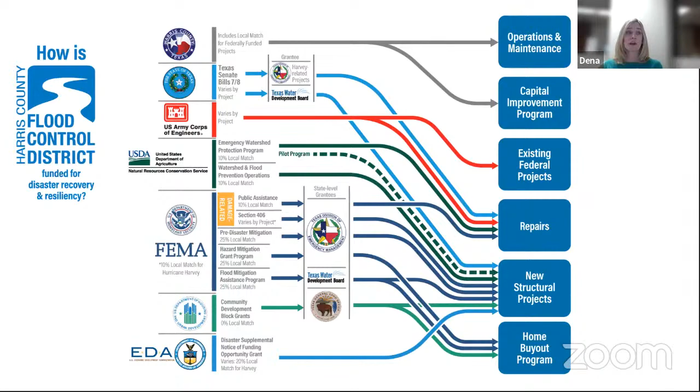We will now move into the part of the program that is specifically about tributaries P138-01-00 and P138-01-01 in the Greens Bayou Watershed Feasibility Study.

The Greens Bayou Watershed encompasses portions of the city of Houston and Humble. The upper reach flows in an eastward direction, and the lower reach flows southward into the Houston Ship Channel.

The watershed covers about 212 square miles and includes 4 primary streams: Greens Bayou, Garner's Bayou, Halls Bayou, and Reinhardt Bayou. There are about 308 miles of open streams, including the primary streams and tributary channels.

Flooding of homes and businesses along Greens Bayou and its tributaries has occurred numerous times in the last 2 decades, with devastating flood levels throughout the watershed brought on by Tropical Storm Allison in 2001 and Hurricane Harvey in 2017.

High-density development combined with significant floodplains cause high damages during frequent flood events. Additionally, storm surges can influence flooding levels along the lower 10 miles of the watershed.

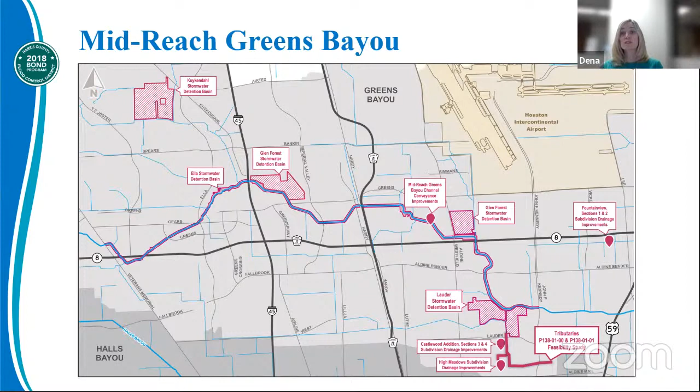Our study area is located on the bottom right-hand corner of the exhibit near the Flood Control District's Lauder Stormwater Detention Basin and the Harris County Engineering Department's Subdivision Drainage Improvements projects in the Castlewood Addition Sections 3 and 4 and High Meadows subdivisions.

Let's now look at the study area. It is located primarily west of JFK Boulevard and between Lauder Road and the Aldine Mail Route Road. Our evaluated area has a drainage area of just over 1 square mile and consists of approximately 1.76 miles of open channels.

While every flood risk reduction project is unique, they all have a common life cycle. Each project begins and ends with common and predictable milestones along the way. Whether a project moves forward from one stage to the next, and how quickly, depends on many factors, including the availability of funding, shifting community priorities, and other changing circumstances.

Each of the stages in the project life cycle concludes with a final product. For example, the construction stage concludes with a built project. For the feasibility study stage, where we are right now with this project, the final product is a report that summarizes the study and identifies a recommended project, which we commonly call the recommended alternative.

We hear often, just build, stop doing studies. We understand that. However, the study portion is essential. There are limited dollars for flood risk reduction, and we want to ensure that we build the right project and that we maximize the use of dollars spent.

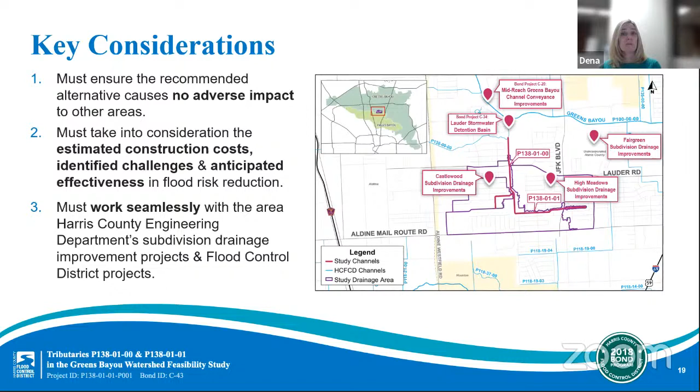Throughout this presentation, we will be using terms like the 500-year and 100-year storm events. So let's go ahead and discuss what that means. Using the 100-year storm event as an example, this is a rainfall event that has a 1% chance of occurring in any given year. In addition to being called a 100-year storm event, it can also be referred to as a 1% annual chance event.

That does not mean that if we have a 1% annual chance event today, it will be another 100 years before it occurs again. Rather, it means that in any given year, we have a 1% chance of a 100-year storm event occurring. This is simply a measure of the expected chance of a specific rainfall event based on available historical data.

The subdivision drainage improvement projects underway with the Harris County Engineering Department are anticipated to help reduce flooding risk in those subdivisions. The existing level of service, which is the amount of stormwater a tributary can carry before it overflows its banks, was estimated for the 2 tributaries in the study area.

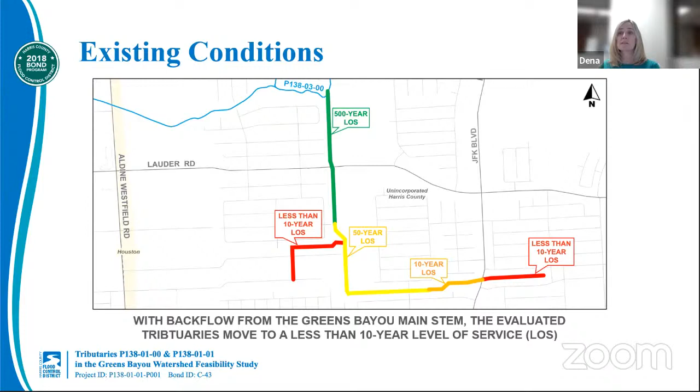The study team also noted that when backflow, the stormwater that overflows from the main stem of Greens Bayou during major rainfalls, moves into these tributaries, it causes both tributaries to move to a less than 10-year level of service. A closer look into the level of service for these tributaries provided insight into the cause of existing flooding issues in the area.

Based on the team's evaluation, we found that flooding sources in the area include backflow from Greens Bayou due to its limited capacity. The team identified that the backflows from Greens Bayou were one of the main factors that caused flooding along these 2 tributaries during Hurricane Harvey and other major storm events.

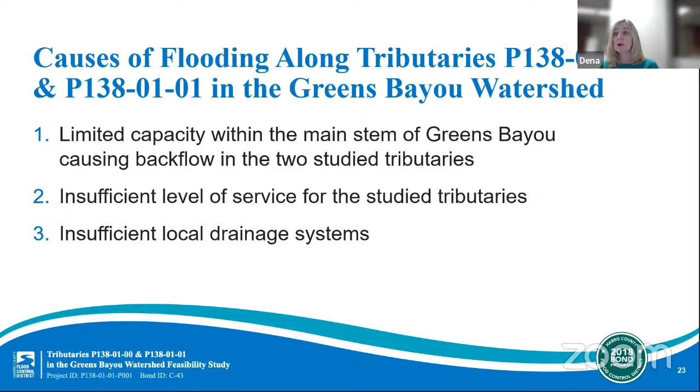Insufficient level of service for the two tributaries, as discussed on the previous slide, and insufficient local drainage systems, which will be addressed in part through the Harris County Engineering Department's subdivision drainage improvement project.

Through our initial evaluation, we have identified several potential opportunities and constraints to accomplish our ultimate project goal. The opportunities include that our study team did not identify any significant environmental challenges or utility conflicts in the study area. This is helpful for keeping costs low and giving us options on how to design an optimal flood risk reduction project for this area.

However, one constraint is that there's limited land available for constructing a stormwater detention basin or making significant channel conveyance improvements without acquiring additional land and/or structures. Our recommended alternative must take this into consideration.

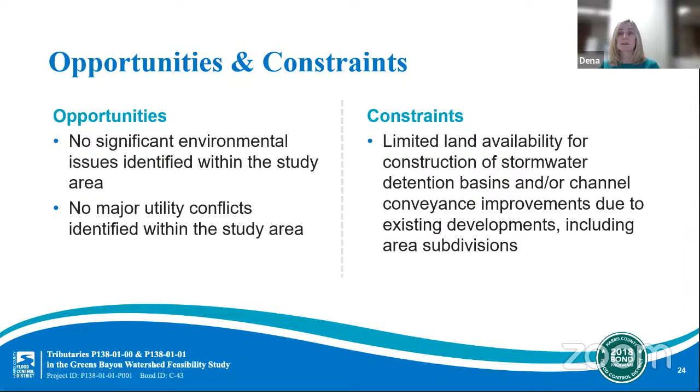When we begin a feasibility study, we always pull out our flood risk reduction toolbox. In our toolbox, we have various techniques we can deploy to reduce the risk of flooding in a particular area. It is important to find the right type and right configuration for each project, which is what we do in the feasibility study stage. On this slide, you will see several of our typical tools, but tonight we will focus on the first two items in the toolbox.

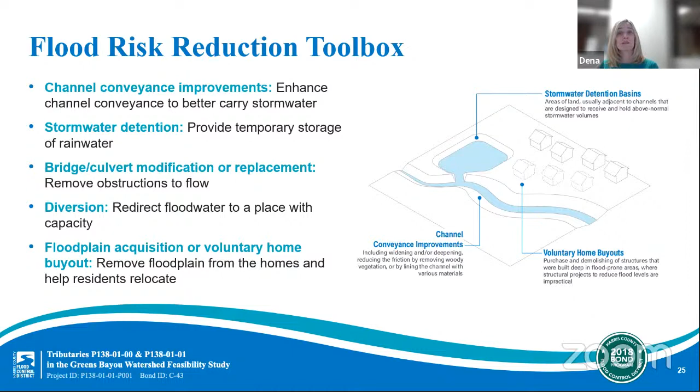These include channel conveyance improvements and stormwater detention. Channel conveyance improvements may include widening and deepening a channel to carry more water, or improving a channel's efficiency by reducing vegetation, or both. Stormwater detention basins are designed to receive and hold above normal stormwater volumes. The water then slowly drains out of the stormwater detention basin as the water level in the channel recedes.

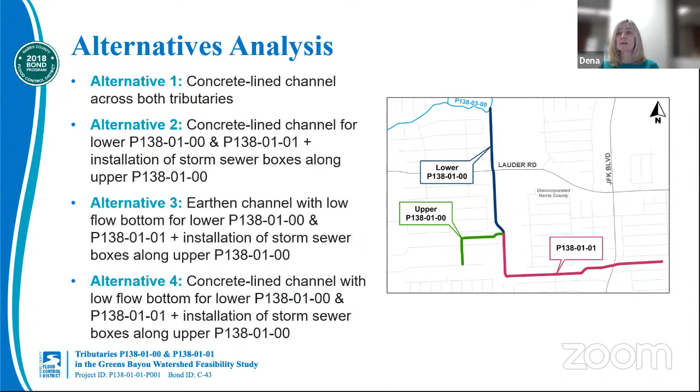Using our toolbox as a starting point, combined with findings on the existing conditions and why this area floods, we evaluated four alternatives that used a combination of channel conveyance improvements and installation of storm sewers.

Ultimately, the top scoring and recommended alternative is Alternative 1, which recommends channel conveyance improvements through a concrete lined channel for both tributaries. To mitigate the increased stormwater flows that will come from the channel conveyance improvements, we will utilize storage volume from the Lauder's stormwater detention basin to hold the increased flows.

Using the Lauder basin that is already underway also helps us solve an identified constraint for this area, a lack of available land for constructing a stormwater detention basin. I want to note that this project alone will not resolve flooding issues in the area. There are a multitude of factors that go into flood risk reduction, including both main stem and localized flooding, but this project will help reduce that risk.

Now, what are our next steps in the project lifecycle? Our next steps are to receive input from area residents and stakeholders, which is the reason we're here tonight. And then we will finalize the feasibility study and recommend a flood risk reduction alternative.

Throughout the project's lifecycle, since all of the area projects work together to reduce the risk of flooding, we will continue to coordinate with Precinct 2 and the Harris County Engineering Department on their area's subdivision drainage improvement projects. And finally, we will begin the preliminary engineering stage.

At this time, we do not know the exact timing for the beginning of the next stage. Once the recommended alternative is finalized and the timing for preliminary engineering is defined, we will follow up with the community as updates are available.

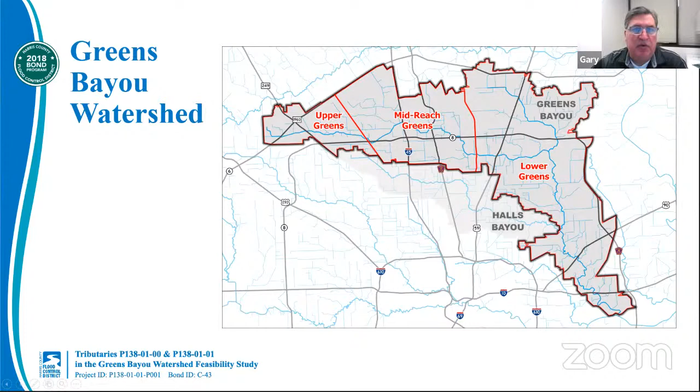But then two, we talked about earlier that the soils in Harris County predominantly are clay type soils that don't absorb a lot of water. So when we get this rainfall that occurs very frequently, it tends to run off very quickly.

The third component from a regional perspective is that our area is very flat, and so there's not a lot of topography. So when we get these large rain events, whether they be several inches in a short amount of time, 5, 6, 7 inches in a couple of hours, or they be 16, 17 inches over a day, what tends to happen is that water begins to pond up, it starts to flood streets, and then ultimately it tries to make its way downhill to the bayous. And because we're so flat, typically that sheet flow, that movement of water, is going to go through neighborhoods to try to get out, and that can create flooding.

So from a regional perspective, that's what's going on. In addition to that, a lot of our infrastructure is older. It was built years ago, and it wasn't sized for various reasons for the amount of rainfall that we now understand that we get on a regular basis.

So there's a lot of work that needs to be done, and that's why we do these feasibility studies, so that we can look at specific areas, identify what the problems are, and then try to come up with realistic opportunities through construction projects to try to alleviate flooding.

All right, thank you so much. Our next question is for you, Jean. What was the goal of the feasibility study?

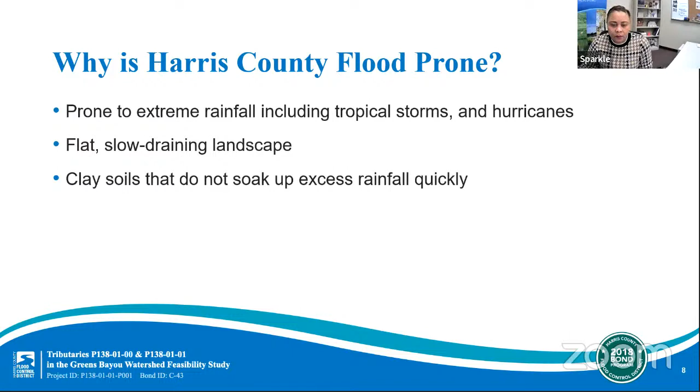Thanks for the question. The overarching goal of the feasibility study is to identify a flood risk reduction project that will reduce the depth, duration, and frequency of flooding in the area of the Greens Bayou tributaries P138-01-00 and P138-01-01.

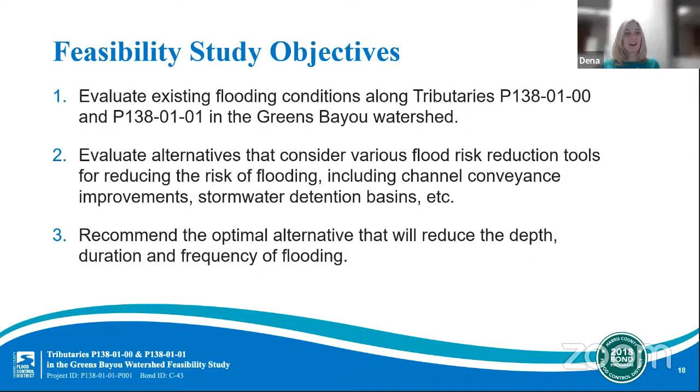All right, and Dena, this is a question we get quite often. Can you explain how this study was funded? Sure, the study was funded with the 2018 bond funds that we discussed earlier in the program.

Yeah, this was one of the projects that was included in this list of projects for the program that would be funded through bond funding. All right, Jean, would you share when any construction would start?

Yes, there's currently not a time frame for construction for this project. The next step for this project is to move into a preliminary engineering stage, and then after that will be design. So typically, under a normal time frame, it would be at least 2 years later, and depending on funding of the project, it could be longer.

All right, Gary, our next question is for you. Is the Flood Control District partnering with anyone on this project? And will any trails or other recreational amenities be constructed as part of the project?

Yes, Sparkle, thank you for that question. I'd like to answer a couple of different pieces to it. First and foremost, the Flood Control District does not expend our capital funds on trails or recreational amenities. But what we try to do is find a sponsor, an agency, city, MUD, any governmental entity that is willing to fund those particular pieces. So if a trail is of interest or recreational amenities, typically we try to partner with an agency, and then we design our infrastructure so that somebody can easily come in and lay the groundwork to put the amenities in.

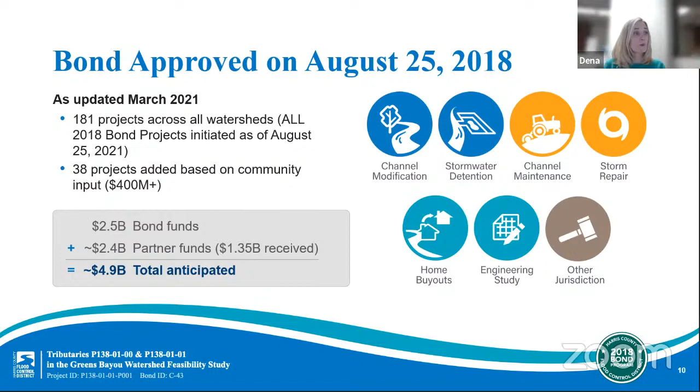If you'd like to learn more about all of those various projects and see which ones are located maybe in other areas of the watershed that you frequent or are interested in, please go over to the Flood Control District's website. I know Sparkle just reiterated it for you, and I believe we have that on a presentation slide we can share as well. You can find a lot of information about the various projects on our website. While the meeting tonight does specifically focus on P138-01-00 and P138-01-01, we do have many other projects in the Greens Bayou watershed. Yes, our website has a wealth of information. We encourage each of you to go out and take a look. Inevitably, there is information specific to your neighborhood, your community, and your area.

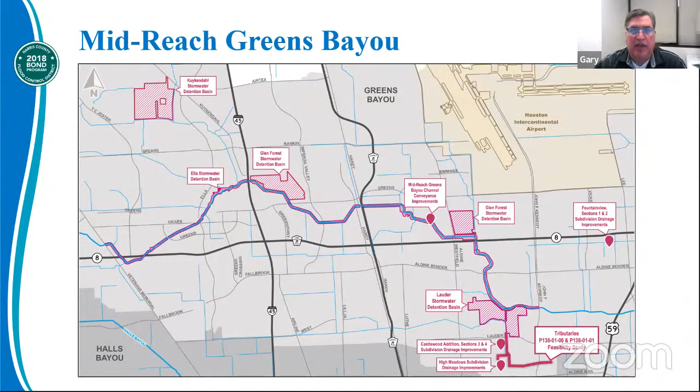All right, our next question is for you, Gary. You talked about another project, the Midreach Greens Bayou Channel Conveyance Improvements Project. Will that project help reduce the risk of flooding in our area? Yes, what we're talking about is the Midreach project. I want to highlight how that's different from the study we just did. So right now, the study we're focusing on is the P138-01-01 channel project. We touched on this earlier, but the flood risk for the homes associated in this drainage area—there are multiple flood risks occurring out here. The first one is, if you look at the graphic on the screen...

When we get a large rain event in the upper part of Greens Bayou, all of that runoff from maybe 100 square miles or so tries to make its way to the Greens Bayou main stem, flowing through by this neighborhood and all the way down to the ship channel. So when we have a large event, such as Hurricane Harvey or Tropical Storm Allison, the amount of floodplain water getting out of banks along Greens Bayou is sufficient that it can actually back water up and flood this area. That impact of flooding is what's being looked at as part of the Midreach project, which is focusing on Greens Bayou and trying to create additional capacity in conjunction with detention to reduce flooding elevations along the main stem of Greens Bayou.

This local area benefits from any reductions the Midreach project puts out, reducing the amount of water that backs up and floods into this area. It'll reduce the floodplain, so there's a direct benefit when the project is constructed. But if we get a large rain event over this drainage area without rain in the upper part of Greens, there's still flooding potential because the channels we're studying, P138-01-00 and P138-01-01, aren't big enough to carry the local flows. So when you add that to necessary neighborhood improvements, which the Harris County Engineering Department is looking at, putting it all together is where you get the most benefit.

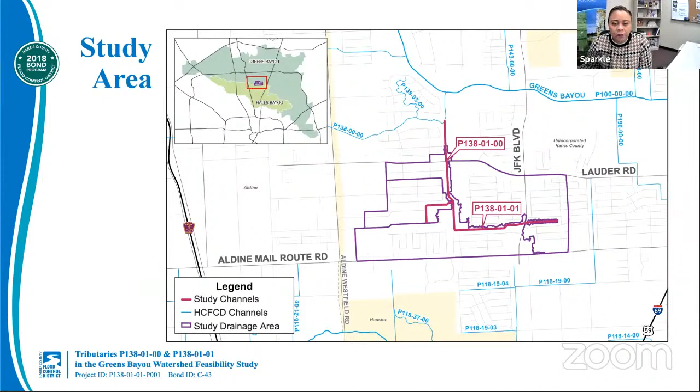Why is the Flood Control District recommending the use of a concrete lined channel in this specific area? Yes, the concrete lined channel can carry flows more efficiently, and once they do that, a lot of times they can generate some downstream impact. In order to mitigate that, for this project we're planning to use the Lauder Stormwater Detention Basin to mitigate any increased flow. But concrete lined channels are usually designed to pass through more water in order to increase the level of service for the channel.

Dena, we have a question about how residents can report channel maintenance concerns. Okay sure, we'd like residents to call in and log a complaint with us. That phone number is 346-286-4000. Please go ahead and call in. We'll take a record of it and make sure it gets sent to the appropriate staff in our maintenance department so they can address the concern, take a look at it, and figure out who needs to be involved in helping to address the situation.

All right, thank you. Jing, I believe there are some Harris County Engineering Division subdivision projects in the area. Can you share a little more about projects that might be in the area? Yes, I'm closely coordinating with a couple of subdivision projects managed by the Harris County Engineering Department. One of them is Castlewood subdivision, the other is High Meadows and Fairgreen subdivision. As far as I know, the Castlewood project has a completed design and is going into construction soon, and the High Meadow Fairgreens project is still currently in design.

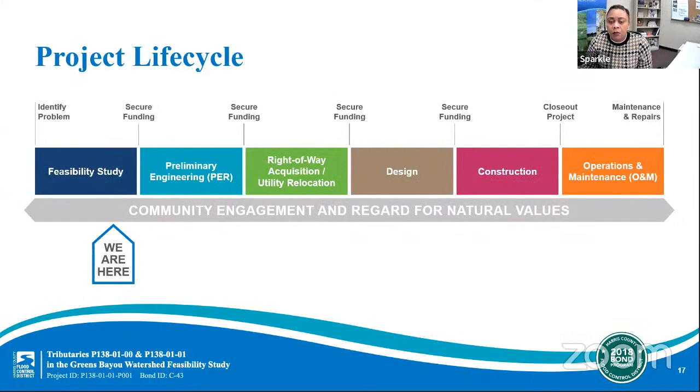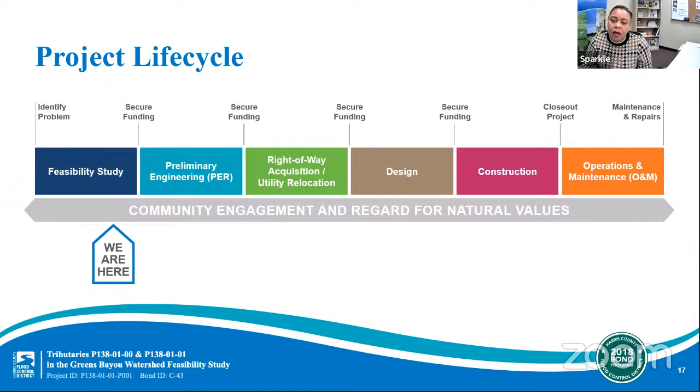What other opportunities will there be for public input on these projects? We do participate in public engagement opportunities at every life cycle stage of our projects, whether preliminary engineering, design, or construction, so we talk to you throughout every step of that process. We encourage you to sign up for email alerts on our projects, and we will keep you posted. If you sign up, you'll also be notified of any meetings happening in regards to projects in your area.

Again, our website is a great resource for that kind of information, and we encourage you to sign up for it. Now, we did have a more specific question from Philip about meeting in his particular area.

We are still following COVID protocols, and so we are not holding in-person meetings at this time. However, we will follow up with every individual that provides a question or comment after the meeting if we don't address it specifically. But I did want to let you know we see you and we appreciate you for being here tonight.

All right, our next question is for Gary. You talked about other projects in Greens Bayou. How do I learn more? And Gary, before you start, I'm going to say the website again. The website's a great resource, but Gary, I'll let you say more.

Well, if we can, is this the website, right? Yes, this is a graphic that kind of shows some of the different projects. These are going to range from large scale to probably small cleanouts and rehabs and those type of projects. But our website is a good resource because it's going to give you an idea of what these projects are. You can drill down.

However, if you have comments or questions, if there's something that you don't understand or you need more information, you can always just send in your information as a comment and say, I would like to speak to somebody and ask some more detailed questions. Then it'll take a little while for that to process through the system, but we have different staff people that, depending on the question, can be directed to them and they can get back to you. That's probably the best way to go, so you can see what information is there, follow up if you have any questions or would like additional feedback, and then we can make sure that question gets to the appropriate person to answer it.

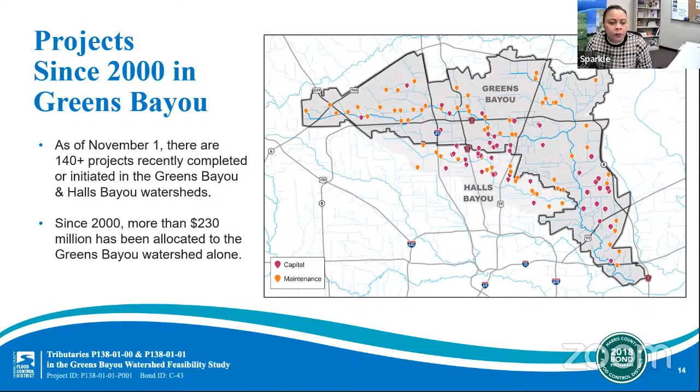All right, thank you. Dena, are you able to explain the storm frequencies again? Sure, we might want to go back. There we go, back to that slide.

So we talked a lot tonight about the 1% annual chance event, or that 100-year storm event, and the 500-year storm event, or that 0.2% annual chance event. Really what that means is exactly like I'm explaining it - it's that annual chance event in any given year. So if, for instance, we had the 100-year or that 1% annual chance storm come through an area, it doesn't necessarily mean that it will be another 100 years before we get that type of rainfall again. It just simply means that statistically, what are your chances of having that amount of rainfall within a given year. So I hope that helps clear up some of the confusion about it.

All right, thank you. Jean, would you take this one? Why do stormwater detention basins need to be paired with channel conveyance improvements?

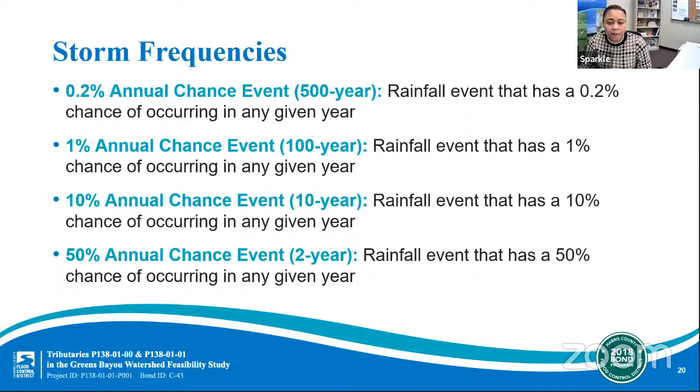So as I mentioned earlier about the concrete lined channels, where the channel is increased in its capacity to carry water - when that happens, usually there's more flow that goes downstream, and we don't want that. Harris County is a no adverse impact community, meaning whatever project improvements we do will not negatively impact those downstream. So in order to hold back that water, usually it comes in the form of a mitigation detention or stormwater detention basin. Oftentimes the detention basins can also serve to lower water surface elevation in a channel or in a receiving stream.

All right, Dena, would you talk about the existing conditions once more, on slide 21, and then the recommended alternative? Sure. So this slide shows the channels that we're here to discuss tonight, sort of in that red or maroon color going up right through the middle of the exhibit that you can see, P138-01-00 and P138-01-01. So all the blue and green shading you can see around those channels is actually the floodplain, or that estimated area of inundation when Greens Bayou comes up high, spills over its banks and backs into the neighborhood.

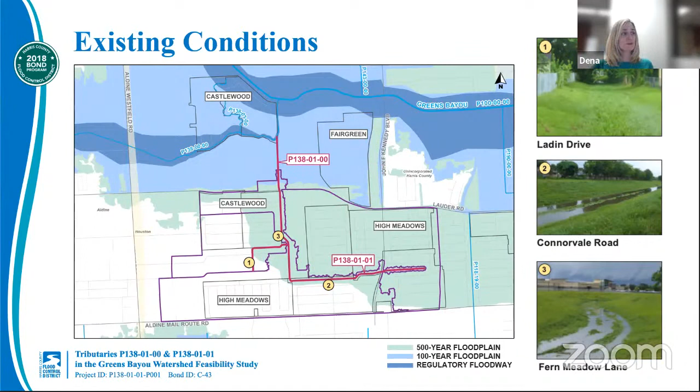That's typically made up of things like storm sewer systems or roadside ditches that you'll see out in front of your house next to the roadway, and that carry the water away from your home and your property into that flood control channel.

And again, as we mentioned earlier, we are a no adverse impact community. So while we're looking to enlarge the size of that channel a bit and put in the concrete lining so that the channel can move water out of the neighborhoods more quickly, we will be looking to take that water that we're moving out of the neighborhoods and storing it in the stormwater detention basin. That way we're making sure that we're not taking water out of these subdivisions and moving it onto your neighbors downstream. We definitely don't want to exacerbate flooding anywhere else.

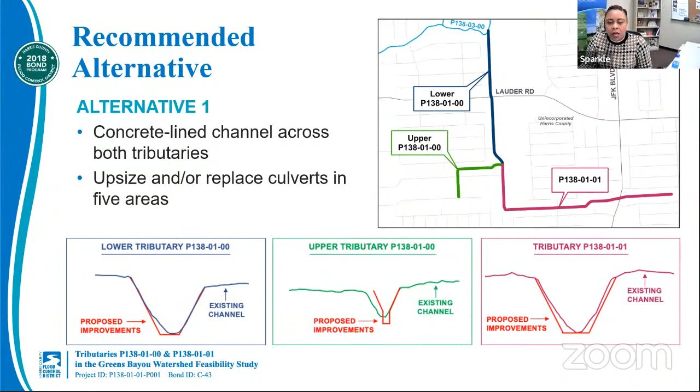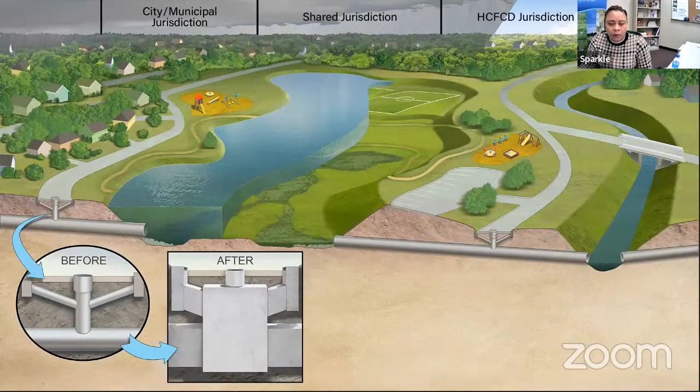That's who we are representing here. The Harris County Flood Control District is a special purpose district. We talked about this at the beginning of the presentation, but we're a special purpose district that was created by the state of Texas and given jurisdiction over the open channel network in Harris County.

Prior to us being created, there were a lot of individual drainage districts or cities that were trying to take care of drainage. And so if a development created a drainage district, they might have a mile of channel, but all they would want to do is take care of that mile. And then as soon as they were out of their boundary, it would move into either a different drainage district or an area that nobody was taking care of.

And so because of the way that was going, the state created the Harris County Flood Control District and gave us the jurisdiction to have one entity whose jurisdiction is to look at all the channel network and look at the county holistically, to say, okay, where do we need to do projects, and given certain authority to be able to do our projects.

So we primarily have jurisdiction on open channels throughout the county. There are some private channels in Harris County. Our jurisdiction comes in — we have certain state given authority in terms of what we can do in an open channel. But if we don't have any channel right of way, we're very limited in what we're able to do. So we're able to go in and remove debris and blockages from any open system, but we're not able to do any kind of infrastructure projects without owning the property, either through fee or easement.

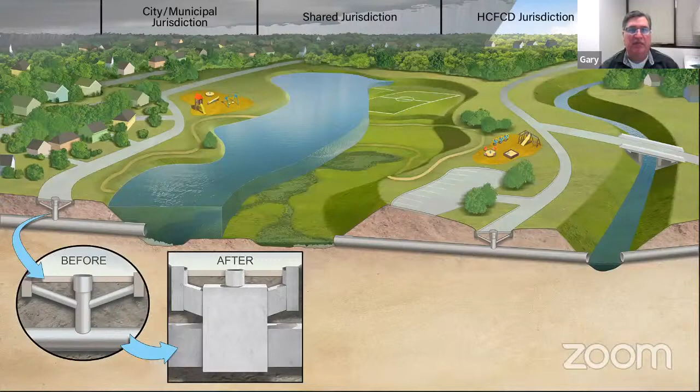That's why in these feasibility studies, we try to start out by not considering whose jurisdiction is out there. We try to start by saying, let's really study and analyze what is going on in this area, whatever the study area is. We look at what happens when a large rain event occurs, where does the water go, what happens to the bayou networks, the storm sewers, the roadside ditches. We run a series of models and computer simulations to figure out what the issues are. Once we know what the issues are, we lay out what can be done to improve it, simulate those improvements, and go through a series of steps to figure out what's most recommended. Then, if there's a significant amount of work that needs to happen outside of our jurisdiction, we try to find those partners to work together to build something that can benefit the area. So that's the short answer.

All right, Gary, thank you for your very short answer.